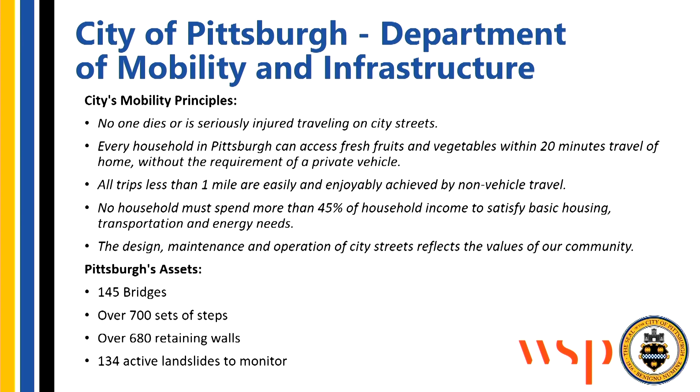So we have 145 bridges in our purview, and the city itself was in what's called Act 47, which is basically like bankruptcy management, from 2003 to 2018. And in that time, I've heard from our paving division that the city was paving some roads and mowing the lawns, cutting grass, and that was maintenance in the city of Pittsburgh through the 2010s and into 2020.

So as we're coming out of bankruptcy protection, the mayor, looking to modernize city streets and improve assets in the right-of-way, formed the Department of Mobility and Infrastructure. And so we have goals that roads are safe, that people have alternative means of getting to their destination. And one facet of that is improving, modernizing, getting caught up with all the actual structures assets in the city.

So as I said, we have our bridges. We have about 700 sets of city steps. It's very steep terrain, and these connect old mills that no longer exist to old communities up on hilltops. About 680 retaining walls, and way too many landslides in the last few years. So we've been keeping busy. This is kind of a snapshot of our projects at the end of 2021.

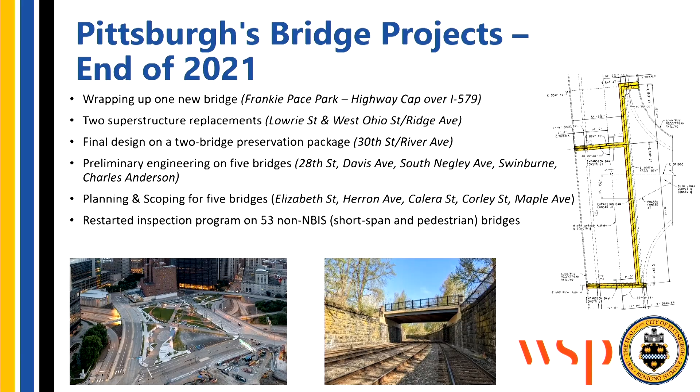We had 5 bridges in preliminary engineering, another 5 in planning and scoping, and we had a backlog of non-NBIS bridges with either outdated or in some cases no inspection history, and we're getting caught up on that. So that's at the end of 2021, and on January 28th, 2022, I'm sure a lot of people in this room are familiar, we had the collapse of the Fern Hollow Bridge.

It was not an old structure. It was constructed in 1973. It was a K-frame with a two-girder system constructed with Corten weathering steel. And there's a lot of information online about the investigation by NTSB and the findings of that.

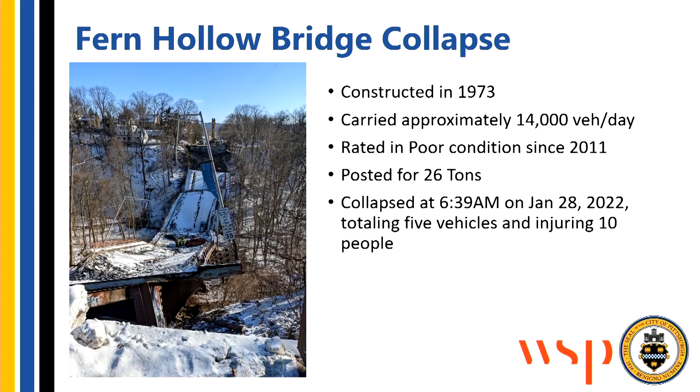Pittsburgh takes a lot of pride in its bridges. We call ourselves the City of Bridges, and I think something like this happening really cut deep in the community and really had both the city and our department asking, how did we get here, and what are we not seeing? Like, what are our blind spots?

So with that, our mayor issued a call to develop a comprehensive bridge asset management program, with the goal of reviewing and evaluating the condition of all of the city bridges and identifying any immediate or near-term needs, and also evaluating and providing recommendations about how this relatively young and very small department needed to grow in order to meet the needs for the assets that we had.

So I'm going to hand it off to Lou to talk about how that program came together. But on August 4th of that year, we awarded the contract to WSP. Okay, thanks, Zach. As Zach said, we were awarded a contract on August 4th, but it did take to the 31st of August to get the agreement signed and actually given notice to proceed. And with that, we had to rush to get task 2 done, which was a report to the mayor.

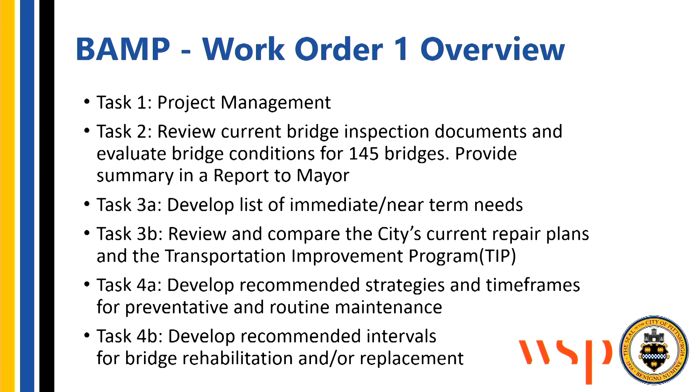maintenance, and then look at their policies, develop recommended intervals for bridge rehab and replacement, develop a plan to create a bridge maintenance division and also bridge structure design staff, and recommend ways to get projects basically from idea to construction more quickly.

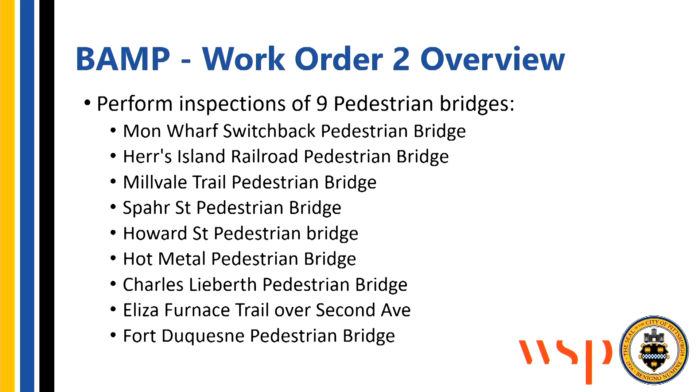Work order 2, as a result of some of the work we did, the city wanted us to get 9 pedestrian bridges inspected on top of the work we had previously done, and these were some of the bridges there. There's a number of large pedestrian bridges on these, including Hot Metal, which crosses the Monongahela River. Fort Duquesne is actually attached to the Fort Duquesne bridge that goes over the Allegheny River. So these were some significant structures that we were asked to inspect.

With that, we comprised the experienced team of bridge inspectors and consultants that had done bridge inspection in the Pittsburgh area for a number of years. WSP led the effort. We had A&A, who was the DBE. They had to actually have like 18% of the work. Azalea is the WBE. They were 7%, I believe. And then Aertia was the veterans-owned business, and they did the drone work for the project.

And then JMT, of course, they also helped out with the processes, and they had former PennDOT staff from bridge maintenance and city of Pittsburgh and Allegheny County staff that actually knew some of the processes. So I thought we assembled a nice team for this project.

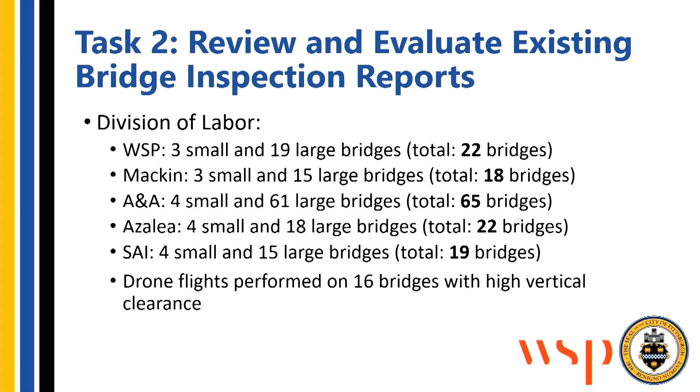And then the drone flights, we decided on about 16 bridges, and we chose ones that were pretty high off the ground, ones that weren't typically always accessed. The entire bridge wasn't accessed through a crane or a lift truck, and tried to not do them over major roads, but in some cases we had to do that.

Some of the key focuses on task 2, review and evaluating existing bridge reports. We'd look for things like, does the weight limit match the analysis in the file? Is the analysis reasonably modeled? Has there been any immediate action taken on any of the repairs? Do the ratings generally match the photo?

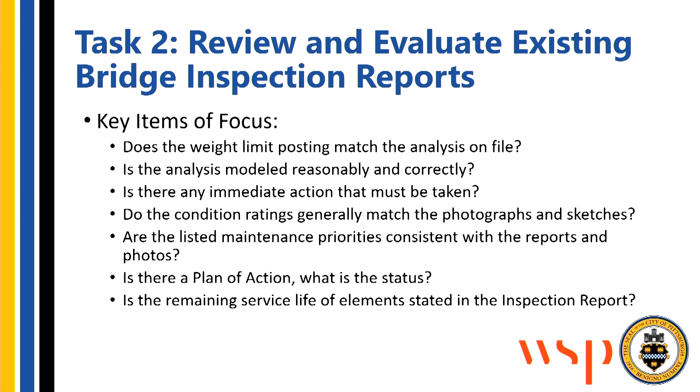So we didn't go out in the field except for some spot checks on the poor bridges and the drone field views. So it was definitely an office review that was part of our work. And you can see some of the other items that were there that we looked at.

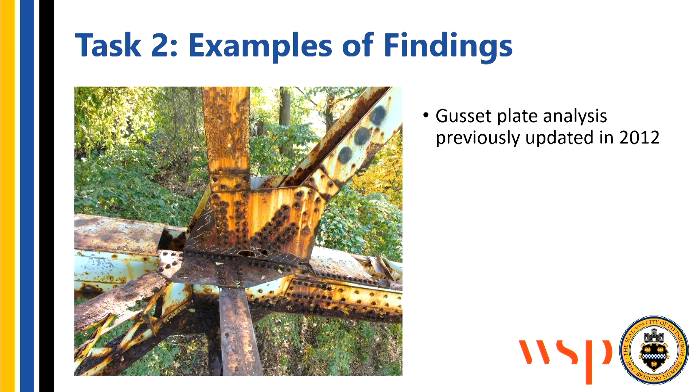The other thing I wanted to say with the report to the mayor is we didn't think there were any other Fern Hollows out there. I guess Charles Anderson came close, but we did identify it in enough time to get it closed. But other than that, the rest of the bridges, there weren't any Fern Hollows out there that we saw.

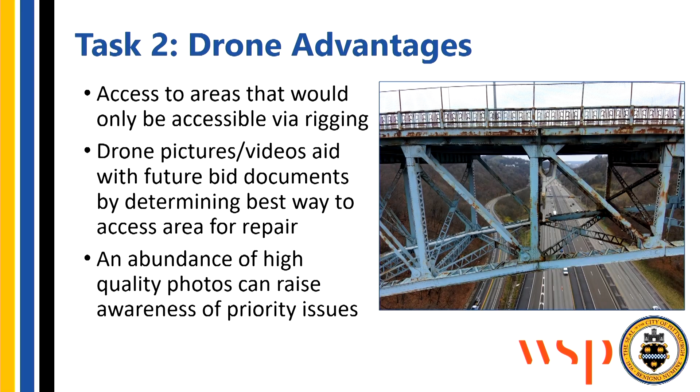Talking about the drone a little bit and some of the advantages there, this is the Swindell Bridge over I-279. There's about 4 lanes and a ramp there. Tough to get in there, when you bend that crane over and try to snake up under the truss. And the latest drone that we had working on this was pretty amazing to me. I had seen drones in the past where if you got under a structure like that and you lost signal, it would fall to the ground. This one did not do that.

It also had battery life of about 20 to 30 minutes, and when the battery went out, it would return to base. So although we did have MPT set up, you didn't worry as much about it falling onto I-279. And the pictures were really great. I've never seen pictures come from a drone like this in the past, and it was definitely a good way to help the city. In particular, they wanted to do a repair contract for Swindell Bridge, and this really helped them show how to access the area for the contractors.

One of the things we wanted to do is compare a conventional inspection to a drone inspection, and you can see the dollar comparison there. The conclusion we had was that if you used the drone without the MPT, it was a little bit cheaper, but if you added the MPT, it was more expensive. So that's one of the findings that we had there.

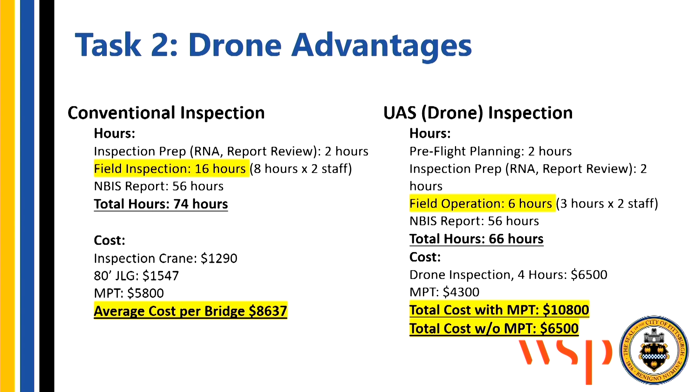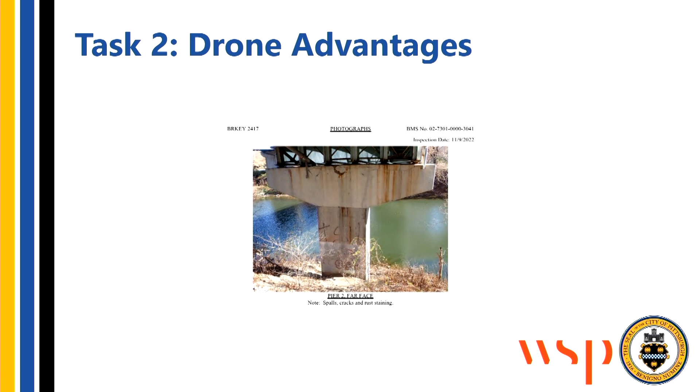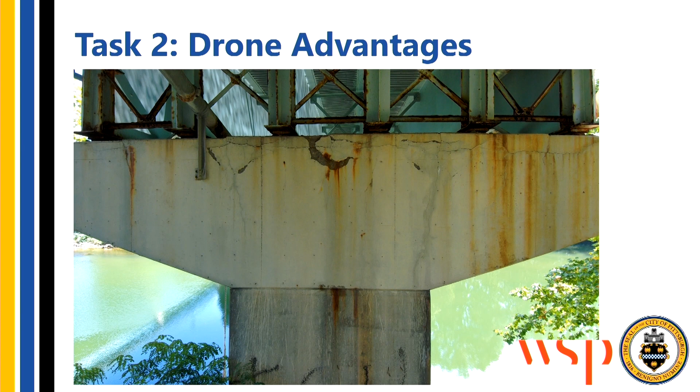And again, I said this already, but the pictures. This first picture you can see is of the 30th Street Bridge over the back channel of the Allegheny River. Kind of a typical picture in the report. Not that you couldn't get this kind of picture with a regular inspection, but in this case we got better pictures, and it really emphasized the cracks and the repair work that needed to be done. The city was going out to do a preservation project on it anyway, and they were able to add this kind of work to the project because of the drone inspection.

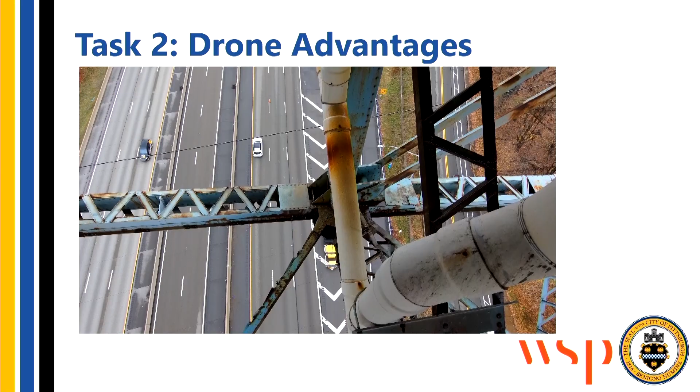This is a video. I don't know if we can get this to work. Yeah, it is working there. So again, this is Swindell Bridge over I-279, and you can see how clear those pictures are. The water that was leaking from there was dropping onto I-279. This was a concern because this bridge has had a history of things falling, between the SIPs and part of an expansion dam falling onto 279 in the past. So this just reiterated how good inspection, getting up in there really close, can find these kinds of details.

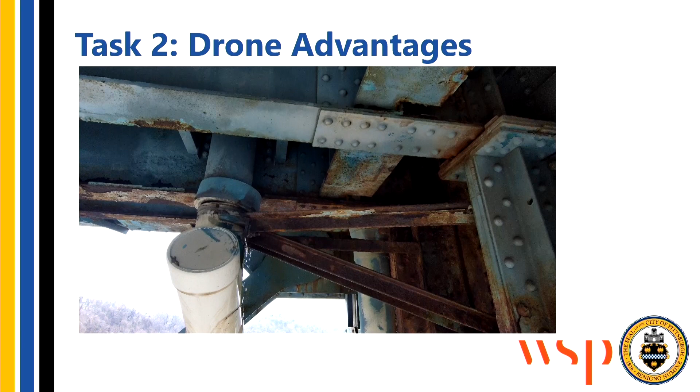Task 3A, this is where we looked at developing immediate and near-term needs. Immediate needs were defined as zeros and ones. Zeros have to be done within a week. Ones have to be done within 6 months. Near-term needs were maintenance priority 2s, which would have to be done before the next inspection, or about 2 years later. The team looked at all the different needs and updated all the costs for if a contractor was going to do these repairs, so the city had a good idea for budgeting.

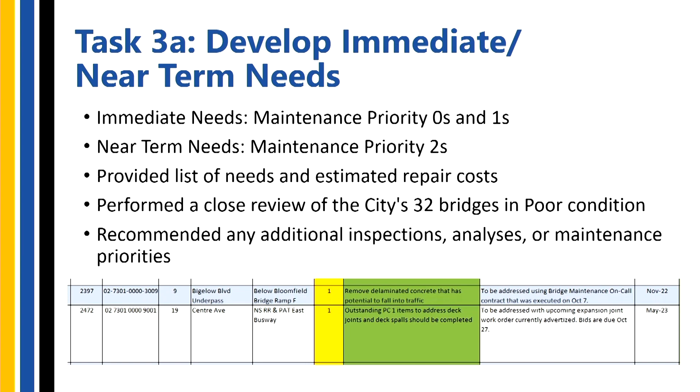WSP also went out and did a close review of not the whole bridge, but the maintenance priorities and some of the key areas on the 32 poor bridges in the city's inventory. And then again, we recommended any inspection, analysis, or maintenance priorities on top of what was already in the report.

3B, we reviewed and compared the city's current repair plan and the TIP against the maintenance priorities that were already out there and against what work had been done recently. If necessary, we changed the priorities. We grouped them by different types of bridges, type of work, and geographical locations so they could put those in future bridge maintenance contracts. We also recommended new priorities for the TIP, which is the Transportation Improvement Program, the local planning document for the area.

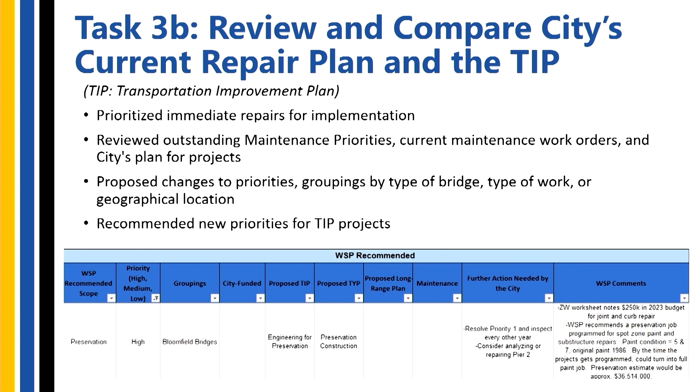4A is develop recommended strategies and timeframes for preventive maintenance and routine maintenance. So we looked at things like bridge cleaning and washing, removing combustible materials from under bridges. A lot of homeless in the area had a lot of materials under that could catch fire. In fact, we had one catch fire in February while we were going through this review.

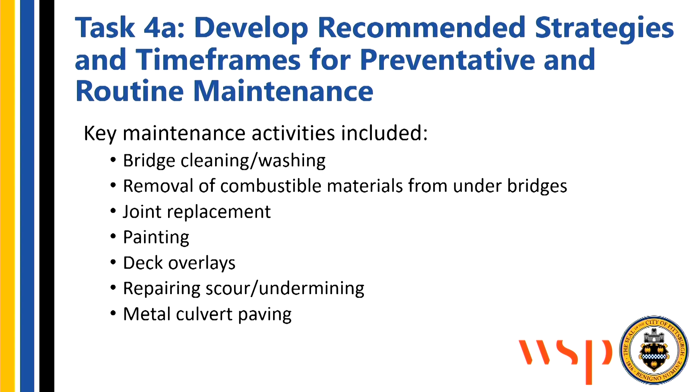Joint replacement was another group, painting, deck overlays, scour and undermining, and then metal culvert paving, which I had done a few of those projects when I was at PennDOT, to extend the life of those metal culverts.

4B was recommending intervals for capital bridge projects, so we'd get into recommending preservation, rehab, and full replacement. Some of the time frames we were looking at were 15 to 20 years for preservation projects, 40 to 45 years for deck replacements unless it had an overlay on it, which could extend that to 60 years, 160-year life for major bridge replacements, 100 to 120-year life for the other bridges, and 40 years life cycle on metal culverts.

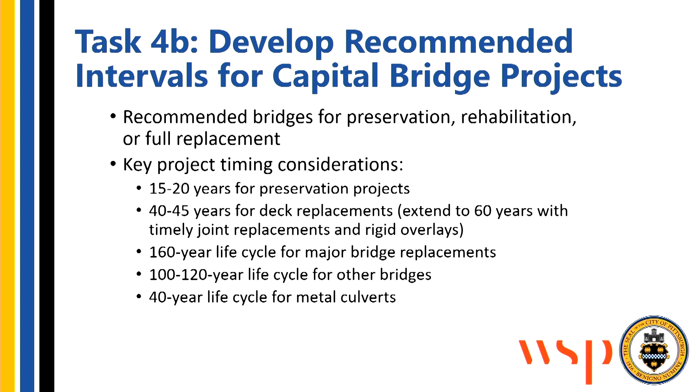Now, I did want to mention, too, that PennDOT, Jason Bruner and his crew came out to the city, and we looked at Bridge Care, which is their program that helps to look at data in BMS and then provide a type of scope of work and an estimate of a proposed project. We ran that program against city bridge data to help get an idea of what the program should look like, and it worked out pretty good, in my opinion.

I think in general we were in agreement with most of what Bridge Care said. It might have been a little bit conservative, but in the end I thought it was in good agreement with what we had proposed prior to making that run. So I wanted to thank Jason because he really went out of his way to help the city with those Bridge Care runs, and we're continuing to have a good relationship with the city. We can run that anytime it's needed to help them out.

On 5A, again, we looked at different staffing compared to PennDOT District 11, which was my old district, Allegheny County Public Works, Beaver County, cities of Cleveland and Cincinnati. And we had meetings with PennDOT District 11, talked on the phone with Allegheny County, Beaver County, and made some recommendations for the city. We recommended an additional 17 staff for the city, either engineering, bridge maintenance coordinator, bridge maintenance repair people, plus design staff. And we also had a strategy for continued review and improvement on that plan.

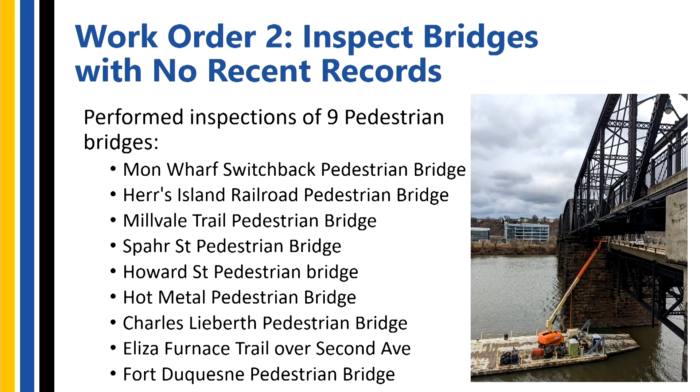And then just to touch on work order 2, doing those 9 pedestrian bridges, which really didn't have good records from recent inspections. The picture you see there is the Hot Metal Bridge over the Monongahela River. And we were using a bucket boat there, which is a neat tool, from Harcon, and able to reach some areas pretty quickly. And this resulted in a priority 0 being identified in December, right before Christmas last year, and the city jumped on it, got it done in 7 days, and it's a nice Christmas present for the city.

So in summary, the Bridge Asset Management Program has aided the city to put them in a good position to develop an excellent bridge program. We don't expect things to happen overnight, but at least they got a good path moving forward.

The city's been working to improve collaboration and communication between the departments, agencies, and other owners in the region. And hopefully the investment by the city, state, and federal governments and the SPC, the Southwestern Pennsylvania Commission, are vital to help advance this work, which seems like they've been really helpful to the city; anytime they request new money for projects, they've been getting it from the region, from what I can tell.

So, with that, turn it over to Zach here for final comments. Yeah, thank you, Lou.

So, we really had to hit the ground running January 28th last year, and in the last 17 months now, I think I'm proud to say we've accomplished a lot. We were an extremely small department. There was myself and my supervisor, and we've now doubled. We've got 4 bridge engineers.

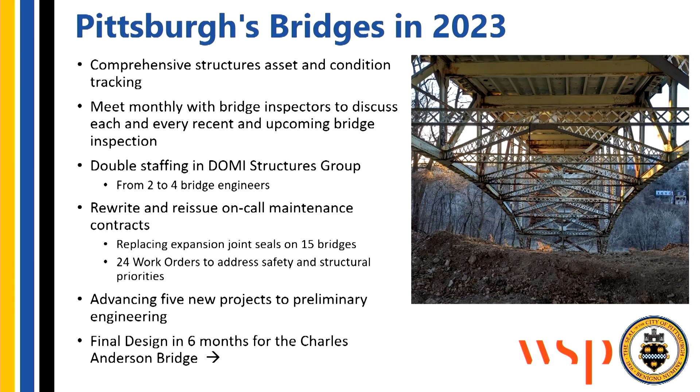We're looking to hire out a bridge maintenance unit that will initially begin working with contractors, but there's a goal to actually expand to in-house capabilities. So we're doing some of the recommended maintenance in-house, bridge washing, maybe resealing some joints, repairing scuppers, just kind of maintenance 101 that was being neglected for a long time.

We kind of revamped, modernized all of our asset tracking. I think as the previous generation of employees was retiring, their knowledge was going with them. We had to kind of learn from scratch and map out where things were and the conditions everything was in. Make sure that we were comfortable with what we were learning from our inspectors, and that the inspectors knew what to look for when they were going out there.

And for me personally, one of the most valuable things in this last year has really been meeting monthly with our inspectors, outside consultants, about everything they've looked at the previous month and everything they're going to look at in the next month. It gives us a little bit of lead time: if we know that the Swindell Bridge, which we mentioned a few times, is coming up for this next inspection, we're getting our maintenance crews lined up because we know there's always the next thing coming.

And also, we're making sure that the load ratings on file, that everyone's comfortable with what's been documented and that it's consistent with what we're seeing out there today.